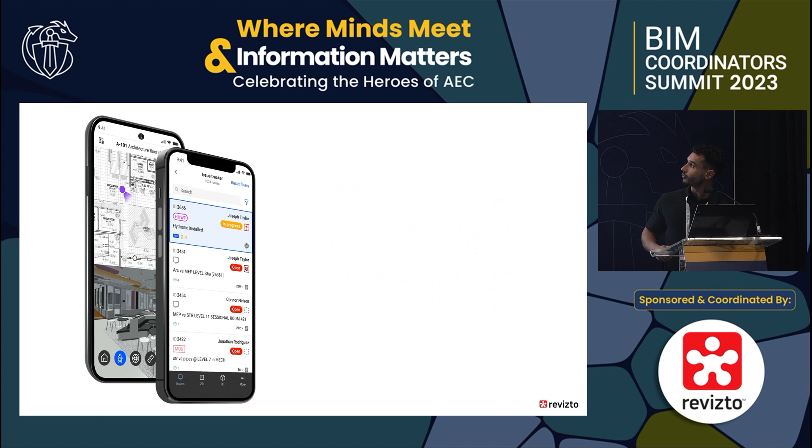The Revizto app works seamlessly with the Revizto desktop application. It creates an ecosystem where project data flows seamlessly between office and site. Whether that's your workstation, your smartphone, or your smart device, we've got that data in one common thread. This connectivity is pivotal in streamlining communication and collaboration amongst all the team members and stakeholders, ensuring everyone is singing off the same hymn sheet, on the same page. As we'll come on to see, that can sometimes literally be the same literal page.

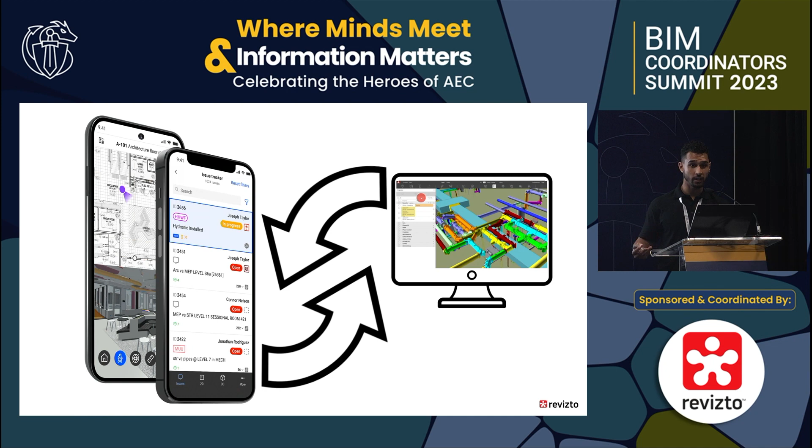Since the app was released, and I'm fairly new to Revizto, speaking to customers and using it myself is interesting. One of the words that kept cropping up in these conversations was convenience. I found that quite interesting because the app is all about connectivity and collaboration, so I actually looked it up. The dictionary definition of convenience is the state or quality of being easy, efficient, and practical. Convenience is often associated with saving time, reducing effort, and providing accessibility, and that's exactly what the Revizto phone app sets out to do.

It removes the barriers and enables access to BIM projects from a device that everyone is comfortable using. Everyone has it. If it's not in your hand right now, it's probably in your pocket, hence Revizto, BIM projects in your pocket. In the next few minutes, I'm going to talk to you about some of the features and benefits, and hopefully it should be clearer how this can really upskill you and your teams and improve that connectivity between the site and the office, keeping your projects within time and within budget.

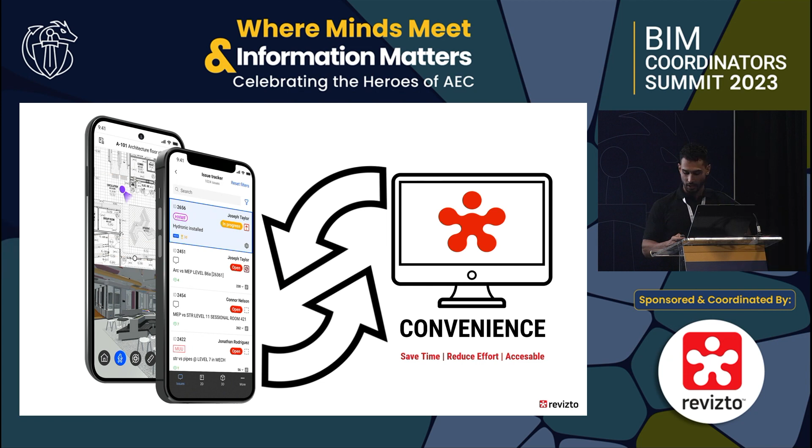One of the key strengths of Revizto, and I've made the assumption here that everyone is familiar with Revizto as an application - if you're not, please come and speak to us as a team - is its ability to seamlessly display model data, reality capture data, mesh data, whether that's coming from Revit, Rhino, Tekla, wherever it might be, in multiple formats. And the mobile app is exactly the same.

It offers a high degree of flexibility when it comes to accessing the model and the data that we need and want to work with. We can take that convenience a step further now as well, because what we're able to do on site using the app is project managers can create groups and bundle these models together. So when you arrive on site and have a particular task to do, you can simply go to the preset views and download the models specific to that task. By streamlining this access, we're looking at the same project data, and it boosts the productivity of the team in the field.

Not only that, it empowers the field teams to focus on their core responsibilities, and again, everyone's looking at everything from the same perspective.

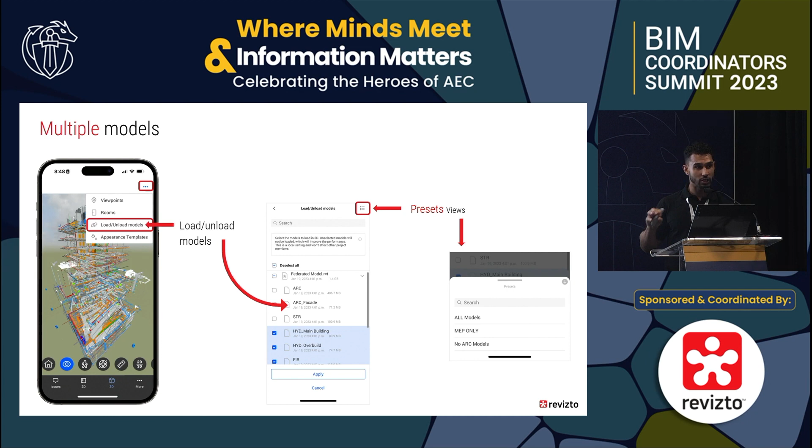I'm sure you'll agree that when it comes to any tool that provides information and detail, no matter how rich the detail is, it only becomes truly usable when that data is accessible.

Apparently individuals spend around 3 hours a day plus on their mobile devices. Sounds like a lot, but in hindsight it makes sense. In fact, in the UK we spend just over an hour eating every day, so we spend 3 times as much on our phone than we do for breakfast, lunch and dinner.

So if you couple that we're using our phones more and more, with the fact that the Revizto app has an intuitive gamer-style navigation system, it's no wonder that when you put it into the hands of a new user, someone on site, they're running around a really large, really complex model like it's an extension of themselves.

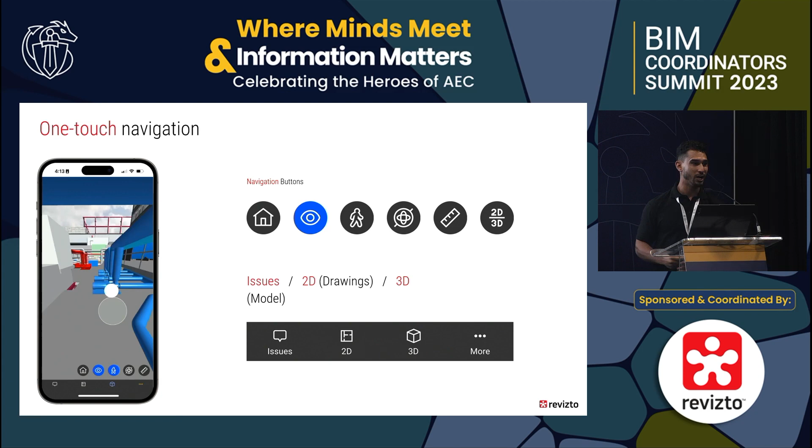It's really, really nice to see. I've only been here a few months, and every time someone comes and uses the new Revizto phone app, it's really exciting to watch them. It's like watching a toddler take their first steps, but running at the same time.

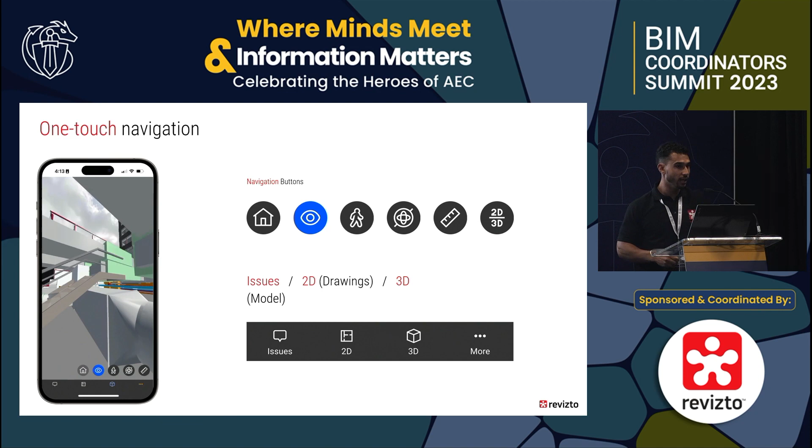So as you can see here in the model, we are walking around. We've got pinch to zoom, we've got one-finger joystick for walking around, and also we've got the gyroscope function, which adds an immersive dimension. So as the user moves the device around, the virtual environment changes with the movement of their device, making it accessible for technical and non-technical members alike.

So in addition to the intuitive controls, the mobile app offers an invaluable feature when it comes to navigating large and complex projects. If we want to pinpoint an exact location within the model, we can make use of the presets. Saved viewpoints are essentially predefined views of the model tailored to specific requirements or something that we want to see, or we want others to see. Each saved viewpoint offers a custom perspective optimized for the particular task.

And these predetermined views can encompass things like levels, color-coded elements, site progress, zones within our project. This means that when we're on site, we can bypass the sometimes time-consuming effort of seeing exactly what we want on screen, turning things off, changing layers and things like that. It also means we can get on with the task quicker.

Everyone can see we're working on the same viewport. What are you looking at? We're looking at the same thing, and have that communication stream in our team.

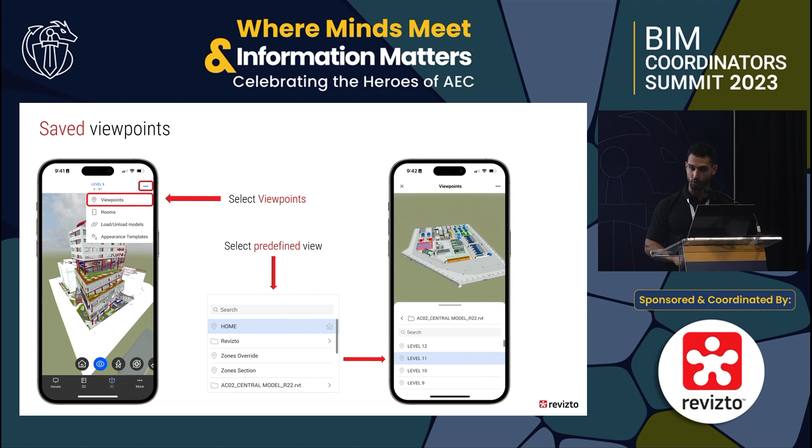Those of you familiar with the Revizto app will know that you've got the ability to delve deeper into any of the model data you have - that can be your model data, your reality capture data, your mesh data. We can view the properties associated with each element, whether it's structural, materials, or other project-related information. This level of detail provides valuable insights, obviously for when we're in the office, but for the site teams as well.

Beyond merely viewing these, we've now got the option to add custom properties. We've always been able to add custom properties, but why is this important in relation to the app? Take a scenario where a project manager or supervisor introduces a simple custom property, a Boolean field, yes or no. So a site team can go to an element, and they've got this simple yes or no question associated with the element.

That could be something like: has that steel arrived on site? Has that steel been erected? Is the QA on that concrete pour completed? Then based on those custom properties, you can color the model so that we now have a visual representation of site progress. And obviously, we're all very visual creatures. So what this does is it really puts power and information into the right people's hands.

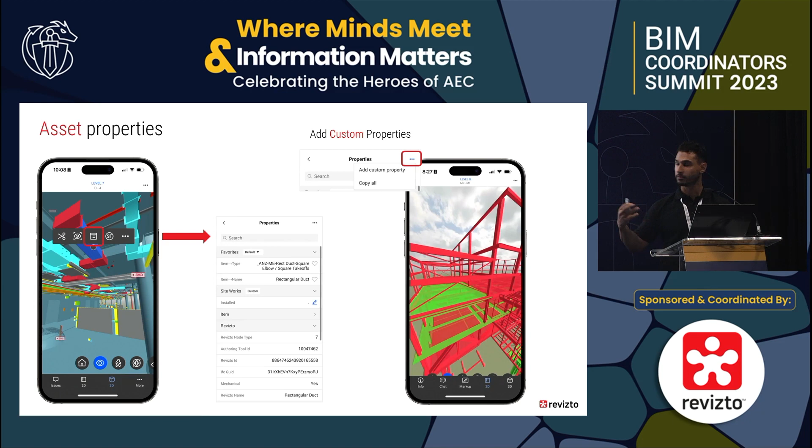We've had a lot this morning - right information, right people, right time. A very nice and simple way to do that.

And then hyperlink - Colin mentioned before about QR codes. I've seen this on quite a few sites now, and I find it quite fancy. When we find ourselves on a construction site or complex environment and want to navigate to where we are in that building, say on a site walk where we hadn't intended to do something but see something amiss, we want to occupy the digital space in the same way we are in reality. So we can go to the rooms and simply select the room we're in, and automatically the app will take us there. If we turn on the gyroscope, we can look around and mimic our real life environment with our digital environment.

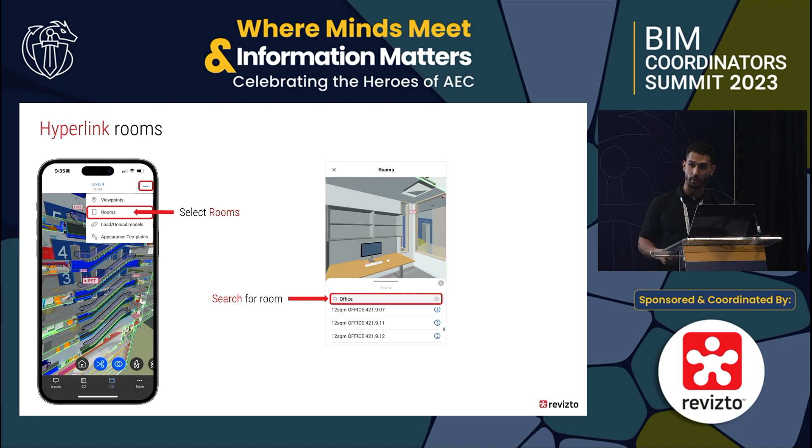Now, you can either do that, or if you don't know what room you're in, you can search and get to it that way. In just a couple of clicks, we'll occupy the same virtual space as we are in reality.

Now, QR codes - this is the slide, and I really like this. You can print out QR codes for your site and link those directly to the QR stamps within your model. So you've got the option to place physical markers throughout a site, wherever that might be, and have a corresponding stamp within your model. Anytime you're walking around site, you can simply scan the QR code and be instantly teleported to that position within the model.

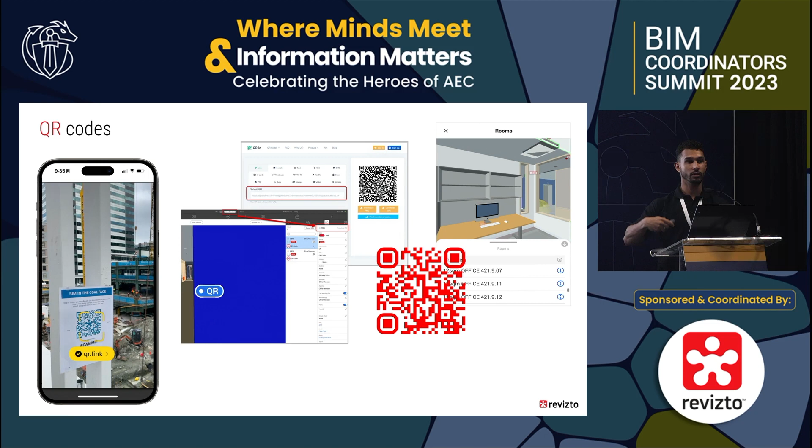I geeked out at this - a lot of people, it's kind of normal, but I think this is a really good way to navigate on-site and off-site. I was on a job in Birmingham the other day, and they had this dotted around the site. It was really nice to quickly come in, have an issue on the app, scan the QR code in the same place, and that issue's been resolved. So that communication stream really enhances and links the real life and the digital model, elevating the user experience.

Obviously the issue tracker is a fundamental feature of Revizto as a whole, and the mobile app takes this functionality to another level. We've got the ability to create issues and attach images in real time directly from site, without the need to upload or send later via email or other means.

If you think about an old scenario - you're on site, you want to highlight an issue, you call your manager: 'I've spotted this.' 'Okay, can you send me a picture?' 'Yeah, I'll send you a picture.' That picture gets lost, and so on. Now we have a seamless link between the site and the office, to either tell someone 'this is an issue you need to go out and resolve on site' or the other way around - something found on site with a dynamic link between site and office. So real-time communication really accelerates issue resolution, making it possible for project teams to respond promptly. When we talk about real-time, it doesn't get quicker than that for smoother project delivery.

Now, one thing I really like about this app, and I couldn't find a way to represent it with pictures, is the speech-to-text feature. I'm terrible at texting - it takes me ages and I make tons of spelling mistakes. But you can simply grab your phone, snap a shot, dictate what you want the app to say, and it will come up in the live stream, adding to that communication flow as well.

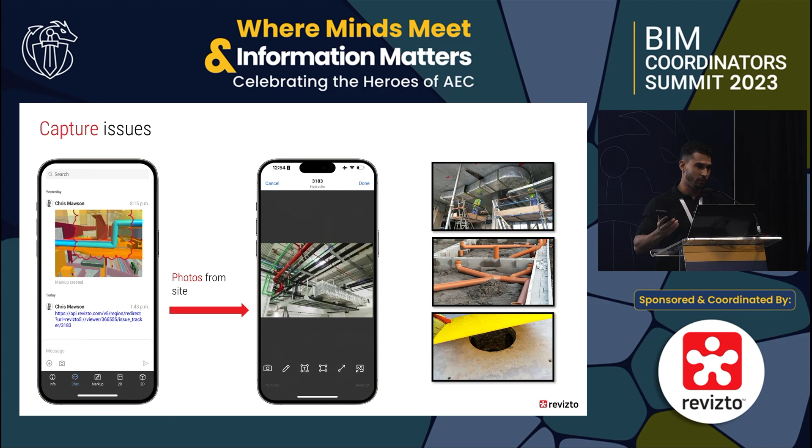So something I really wanted to highlight on this slide is, at the beginning, I didn't want you to think about this as just another app. It's a tool that works together with the desktop application. I think it's essential to recognize the broader value than just having the model available on your phone - it really opens up that communication stream among project teams.

And obviously, we're not going to forget about 2D drawings. I think Colin mentioned Kia going to a paperless site, which is fantastic. It's a natural progression for people to move away from paper PDF copies to 2D digital drawings, and that's a space we support. It's a comfortable space for a lot of site teams still.

So it goes without saying that one of the primary advantages of digital 2D drawings is the fact that you don't have to carry around a whole bunch of 2D pieces of paper. I remember when I was on site, I'd have to run back to the site office to get another revision of a drawing because I had the wrong revision or I was on a different floor. So it really eliminates that. In the mobile app, we have the option to see all of our 2D drawings instantaneously, wherever we are.

And we've still got the ability to create issues, create red line markups, and have that communication stream. But what's really nice is even if 2D is your preferred method of working, say if your team's split 50-50, half like to work in 2D, half like to work in 3D, it doesn't matter because we've still got that dynamic link between the 2D, the 3D, and the issue tracker. So you could do an issue in 2D, and your colleague somewhere else on their app, or even in the office, can be looking at that same issue in 3D, and you've got that link.

And one of the things we've really found with this is that apprehension to people working in 3D, it's still on sites nowadays, especially in the UK and Ireland. This is really helping people to get over that. So it's upskilling the teams at the same time. They can work in an area where they're comfortable and then jump into the 3D model when they want to.

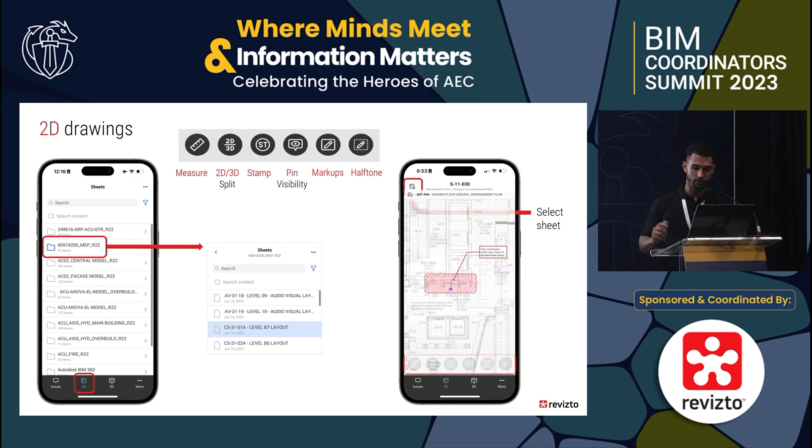And you'll notice there's a 2D, 3D split. And this is actually one of my favorite buttons. This is unique to the Revizto mobile app, and it allows users to simultaneously view both the 3D model and the associated 2D sheet.

So 'game changer' gets banded around a lot, but I feel like this is a bit of a game changer because you've got the option to see both now, and you can even use the 2D map as a wayfinder. So you select anywhere on the 2D and it will jump you to the 3D position. Again, it's removing those barriers when it comes to navigating your position on site. You can see all the information that you want displayed in that 2D, 3D setting.

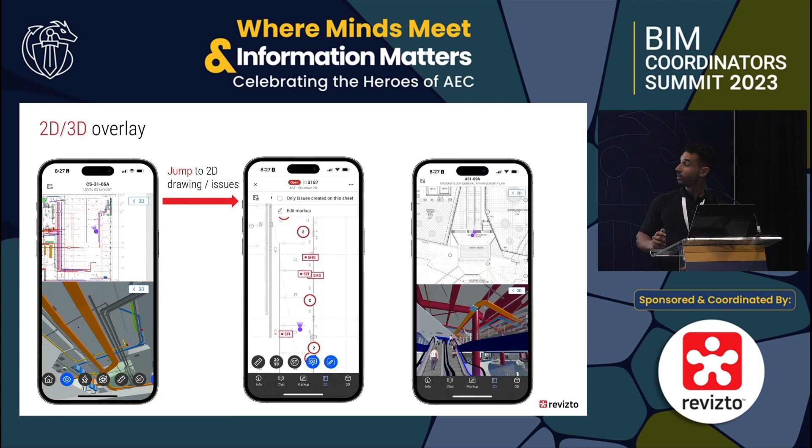So that's what we are trying to do here at Revizto, is remove those barriers, make things convenient, make things as smooth as possible, and help you create teams where communication flows effortlessly in real time. So from that front, this makes communication more agile, and it means your future teams are connected, they're efficient, and they're productive, hopefully in part to this tool, the Revizto mobile site app.

So we've investigated some of the capabilities. By no means is it all of the capabilities. And it's not just about access, it's about that convenient, instant access and that communication between site and office.